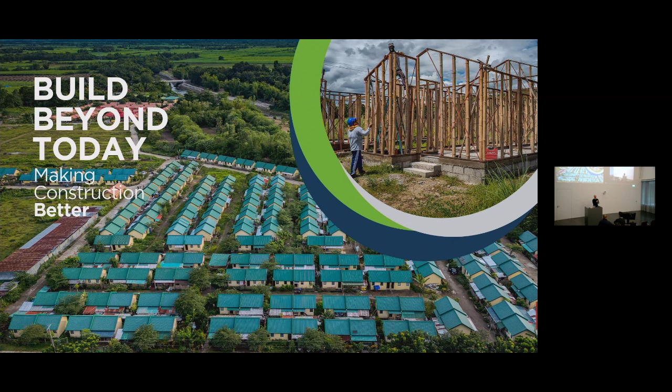Thank you, Johan. My name is Pablo. I'm the general manager of BASE Bahay Foundation. I joined BASE Bahay 5 years ago. Before that, I was the general manager of Hilti Philippines.

I did quite a lot of lunch and learns with various customers, and I really have to make the presentation very interesting. Sometimes customers would be eating while I'm presenting, so I have to make my voice loud and be very animated just to get their attention. I'm so happy I get 100% of your attention today, and thank you for having us.

What we will be showing you today is what we are currently doing at Base Bahay: making construction better. I guess this resonates with everyone's strategy. Making construction better is not only at the high-end construction market with our Hilti power tools, but we try to cascade it all down to the affordable housing sector. That is where we play, and that is where Hilti Foundation takes a very active role.

We are a non-profit organization, initiated as a brainchild of Hilti Foundation. We are actually a technology provider. We develop the technology and try to get as many partners as we can, networking with government, private, and other non-government organizations, so we can build community and offer them the technology we generated through socialized housing. When we talk about socialized housing, we try to make sure it is up to high standards of construction in affordable housing.

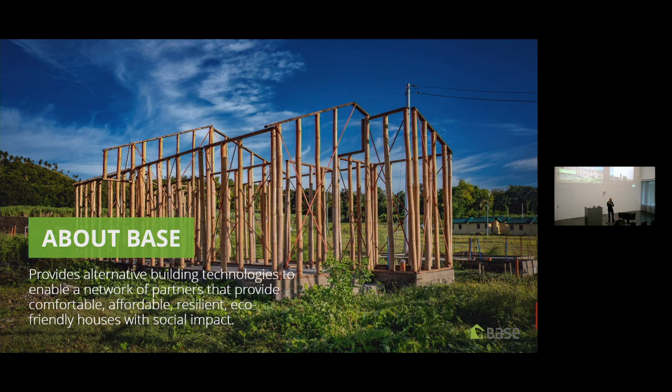My colleague will tell you more about what we are currently doing in Base Bahay. So why socialized housing? Why the affordable housing sector? There is a huge housing gap around the world, and 1.6 billion—it's no joke.

1.6 billion units of housing is needed. To make it a little closer to home, in the Philippines it's a 22 million unit gap in housing. Why the gap? Because there are issues in government funding, issues in the design of the houses, issues in affordability, and issues in the entire ecosystem that makes it work.

The role of Johan in Hilti Foundation is not an easy one because it is such a complex topic, but that is why we're here: how can we address this gap in terms of generation of technology using the same quality and standards? Now, next question: why bamboo?

In the global south, bamboo is an abundant material. If you have this abundant material, it already supports you in terms of affordability of the unit and the design. Now the next question is, how would you design it? How would you use this type of abundant material?

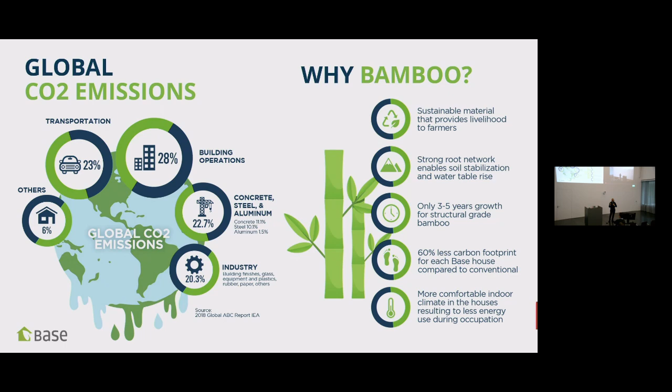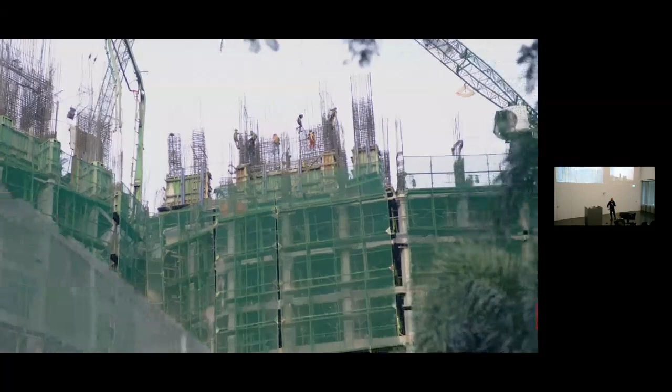Probably some of you have already seen this, but I think it's worth looking at again. As global inflation drives up construction material prices, affordable and innovative solutions for low-income families become even more critical. Our bamboo technology reduces costs by up to 50%, creating green and disaster-resilient homes.

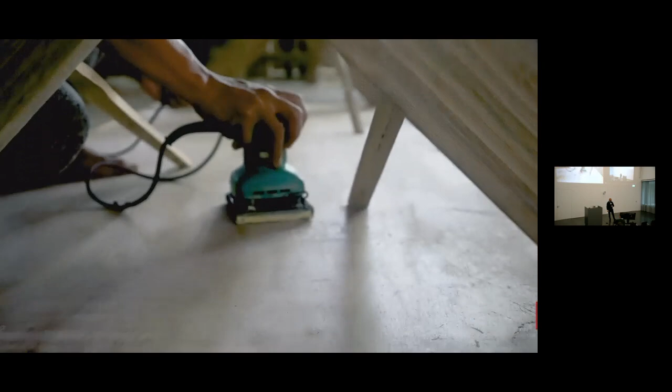Emerging from processing centers, a transformative value chain now supplies engineered bamboo to construction sites. This dynamic engagement has evolved into a thriving bamboo housing industry in the Philippines, meeting affordable housing needs and fostering livelihood opportunities. In the global south, where the greatest housing problems exist, bamboo is abundant, making it even more likely to be the material of choice. Through global partnerships, bamboo has the potential to close the housing gap and help transform societies.

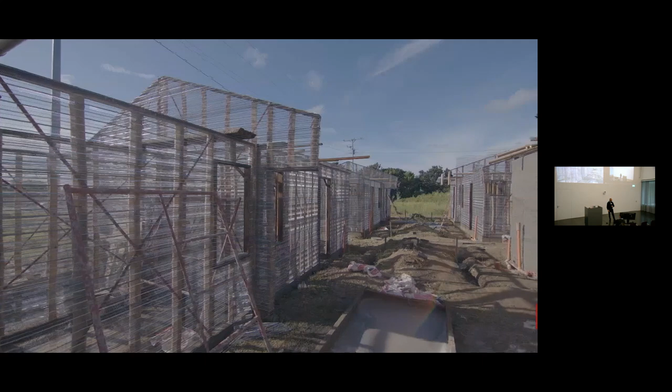The technology you'll hear about today is called the cement bamboo frame technology. It is actually your timber frame, and the design knowledge behind it is very close to your hearts here in Switzerland, because in essence, it is timber frame design, but a little bit re-engineered to fit that affordable housing mindset.

If we are going to use this local material for housing, we have to make sure it's a permanent structure, not one that will fly off when a typhoon hits or get demolished when an earthquake hits. So we designed it to be typhoon resistant and earthquake resistant according to the codes, compliant to the codes. And if you have a partition between two units, you make sure the fire rating is correct, that the wall is fire rated, even if you're using bamboo material. Just the fact that you're thinking in these terms means you're already thinking at an engineering level in the design of affordable housing.

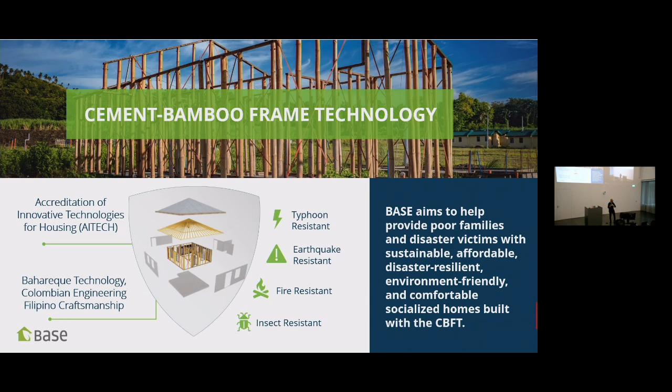And of course, they would say it would be eaten by termites. Yeah, the same thing with any other bio-based material—it would be susceptible to insect infestation, and treatment is crucial. But at the end of the day, our objective is to help poor families, give them this affordable housing unit, give them this design that they can use.

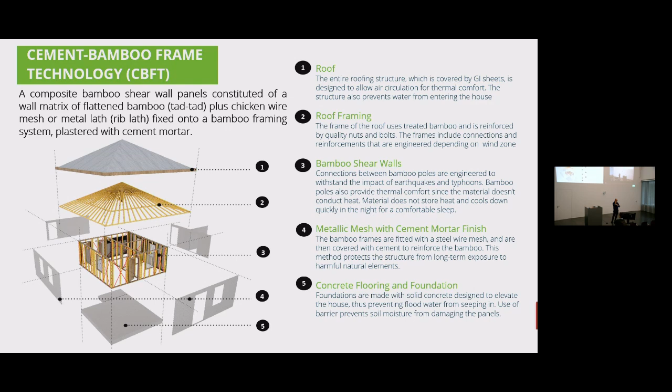The technology you'll be seeing is very similar to your prefab timber frames. You can prefabricate panels, but instead of timber frames, you use whole bamboo poles. Out of these panels, you bring them to the site, assemble them like Lego, and then put up the truss structure. The truss structure, together with the shear wall frame, operates as a single unit, carrying the entire live load, dead load, and all the design load needed. As an architectural cladding, you put a thin cement mortar. There are many examples later on that you'll see more about this.

So the structure in its simplest unit is a panel, composed of a frame, but instead of timber frame, you use bamboo poles. Then you need some sort of architectural cladding—it could also be made of bamboo material, or a wire mesh with a thin coating of cement mortar.

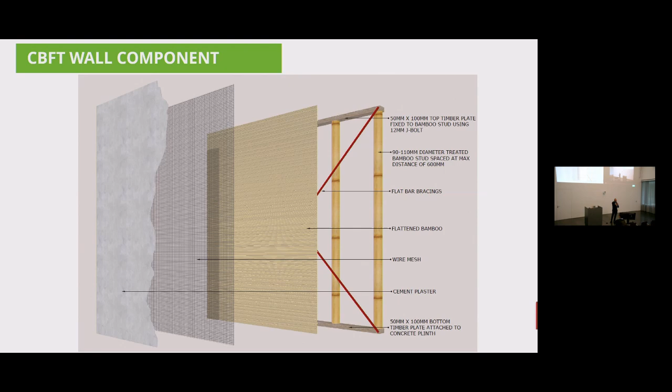Just to show the non-technical among you, here's how it looks when you assemble this.

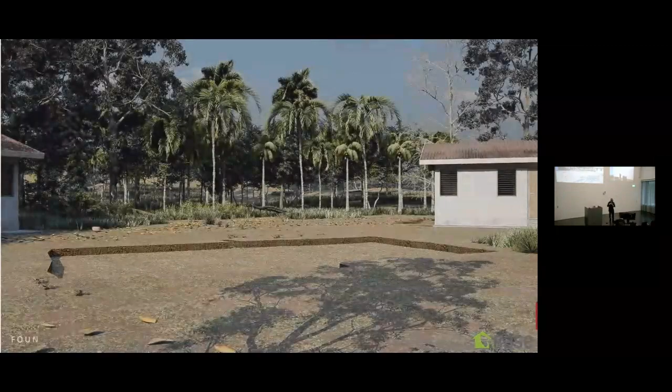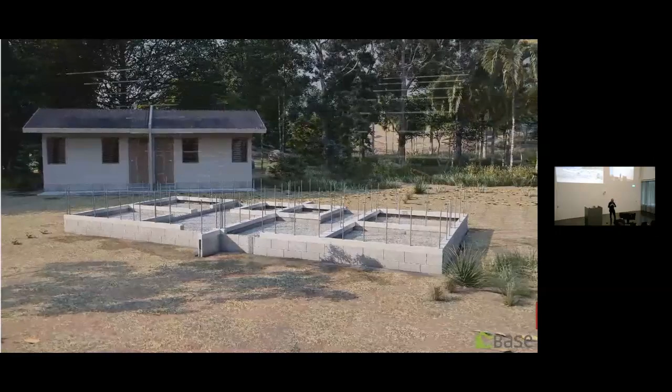Before we begin construction, we make sure the site is fully developed. The way you build the foundation is similar to any type of house—you prepare a tie footing foundation, the same with your reinforcing bar. You do the base, then the flooring, then the sokalo, where you'll put all the panels and all the temperature rebars for your concrete flooring. Very typical to current construction of how we build houses.

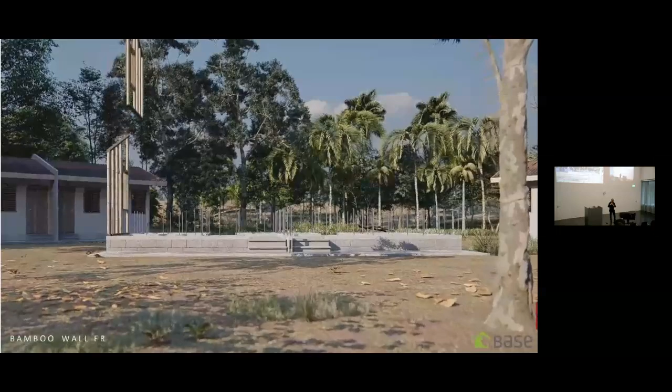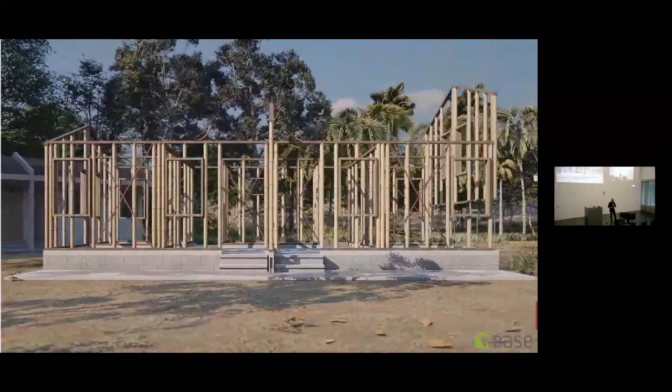Then you do the concrete floors, and then you assemble all the panels, like a Lego. There's a different team working on the panels, and a different team assembling the panels on site—just like the timber frame. And then even the trusses can be modularized, including the lintel or the purlins, all made of bamboo poles.

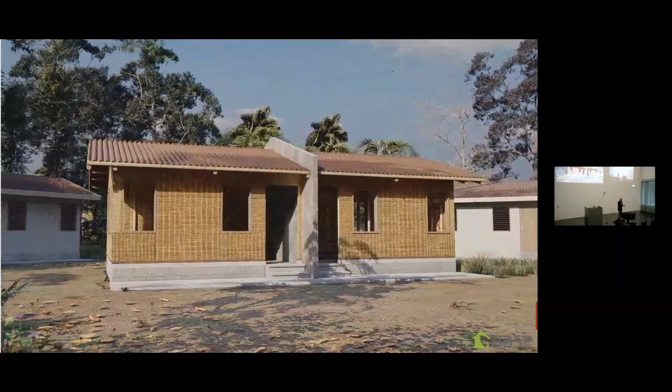Then you put your roofing, which could be any type of material. For architectural cladding, you can even use bamboo materials, put a wire mesh, and like a ferrocement, you plaster it. Then you apply the skim coating, very similar to what you'd do on a mortar wall, and then put the fascia board, door, and windows—very easy. The process can be taught and transferred to the community where we are currently working.

This is a very simplified design. Why does it look like an ordinary reinforced concrete house and not the beautiful bamboo buildings you see in Bali, Indonesia, or in Vietnam? Let Luis answer that for you—I'm transferring this difficult topic to Luis here.

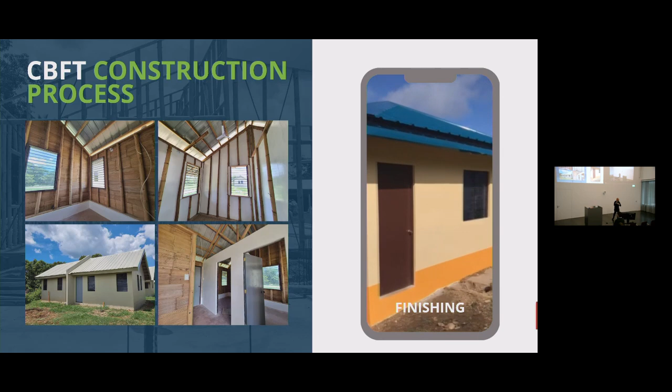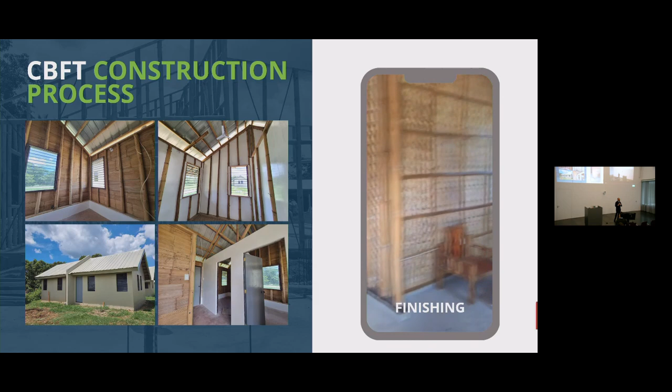So the finishing of the house looks like this. On the outside, it looks like your normal reinforced concrete or concrete hollow block house. But when you look inside, it now depends on who will be receiving the house—they can have this style, or even the white one, depending on how the beneficiary would like the architectural finish of the inside of their house.

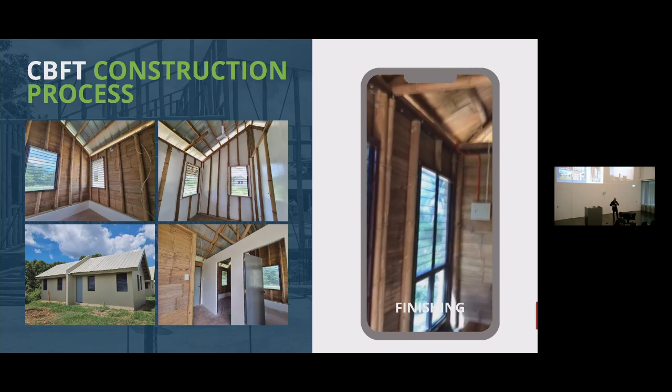We would like to have as many Hilti members know about what we're doing in BASE Bahay through Hilti Foundation. One best form is our EBB, or Engaged Beyond Business. We had Region A2 team, headed by Alim Hirani, the current region head, and they did a house build in the Philippines using the same technology.

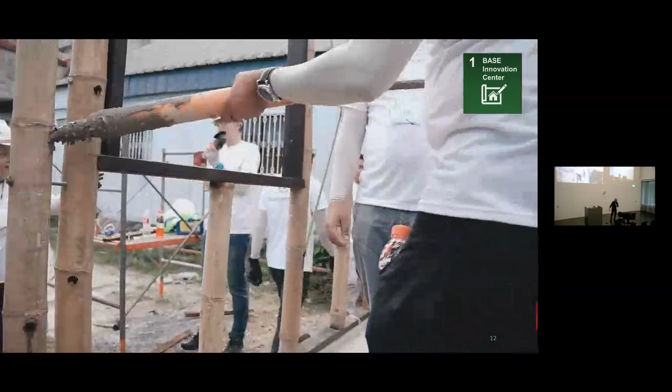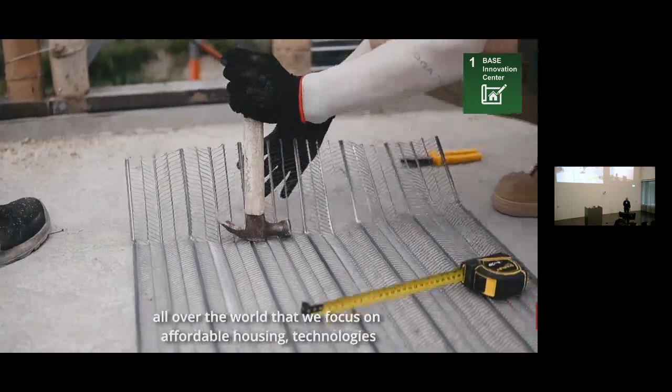We at Hilti believe in building a better future. And it's through the work of the Hilti Foundation all over the world that we focus on affordable housing technologies, on music for social change, and economic empowerment.

Today here in the Philippines, we have a fantastic example of building affordable housing through the cement bamboo frame technology that enables us to hand over a house to underprivileged people who can build on a strong foundation. Having a home is the start to having a more sustainable and self-reliant home and life.

It's a fantastic opportunity, and we're looking forward to many of you coming to the Philippines and experiencing that on the ground firsthand. We're also looking forward to seeing many of our Hilti employees join us in the Engaged Beyond Business, and later during the Q&A you can ask more about that.

Now our objective is to make bamboo a mainstream construction material. For engineers, researchers and technical people in this room, if you would like to use a bio-based material as a mainstream construction material, first it has to be in the codes, or at least the testing and properties have to be standardized. To do that, you need full research to put all the data into the codes. Why does it have to be in the codes? Because if it's not in the codes, no one will build it, no one would specify it, no one would even teach it. And if there's no specification or design work happening, there would be no demand.

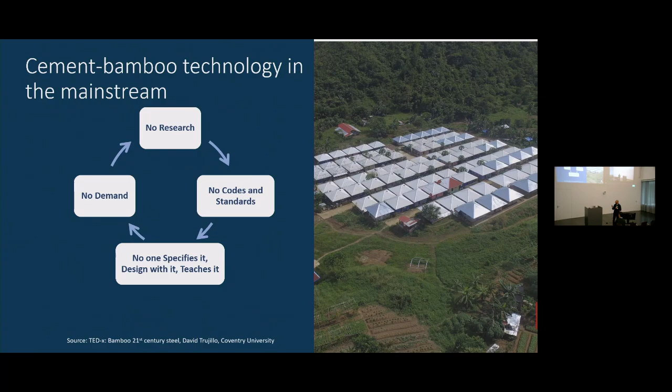That is why through the BASE Innovation Center and the Hilti Foundation, we initiated research on the codes, and then started the technology transfer so we can really make this material a mainstream material for construction. I'll pass you on to my colleague here to discuss more about what we do in the BASE Innovation Center.

Luis? Thank you, Pablo. Hello everyone, and thank you for coming. I'm Luis Felipe Lopez, head of technology at BASE Bahay Foundation in the Philippines.

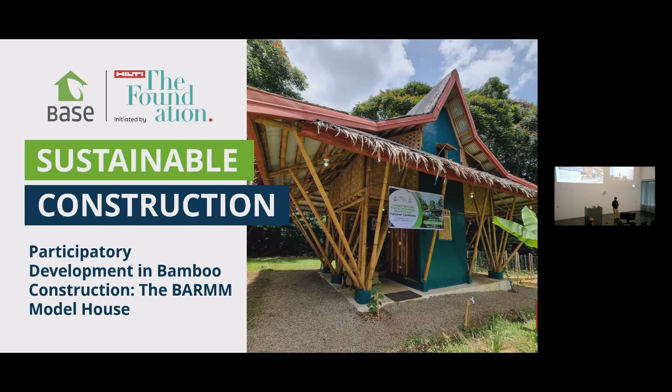Today I want to share with all of you not only what we are doing in our innovation center, but also a project that is really interesting in collaboration with communities, and how this technology can help people who are really in need. Before we go into the project itself, I want to talk a little bit about the Innovation Center and why this is important for us and for the Global South.

In 2021, Hilti Foundation and BASE Bahay decided to launch the BASE Innovation Center. This is a research laboratory that can test structural components, characterize mechanical properties, and do other kinds of work. This is important because bamboo construction has been used in the Global South for thousands of years.

People in the Global South have been living in bamboo huts and bamboo houses for thousands of years, but it was never taken as a structural material. The reason is clear: the development of structural engineering happened in the Northern Hemisphere, in Europe and the US, and there is no bamboo there. So it was never thought of as a structural material. But in the Global South, it is.

Now things are changing, and this is a great opportunity to have a laboratory in a place where bamboo is available, allowing us to work on the research. This is a short tour of the lab. You can see the laboratory. We have a universal testing machine. We can test different properties, different species.

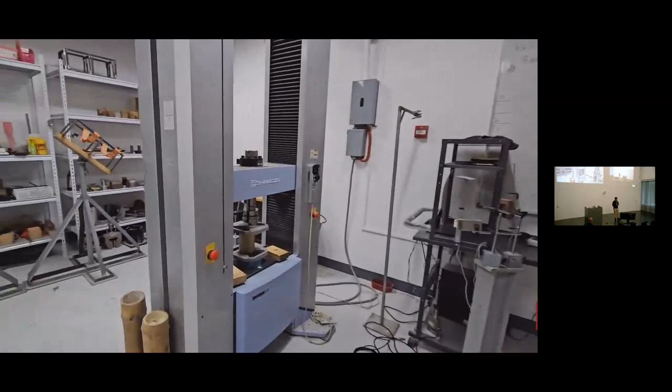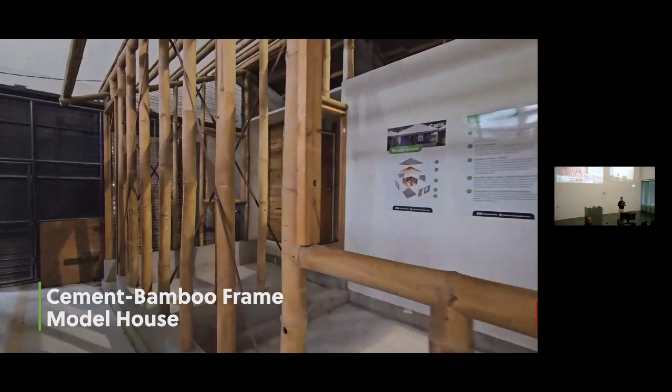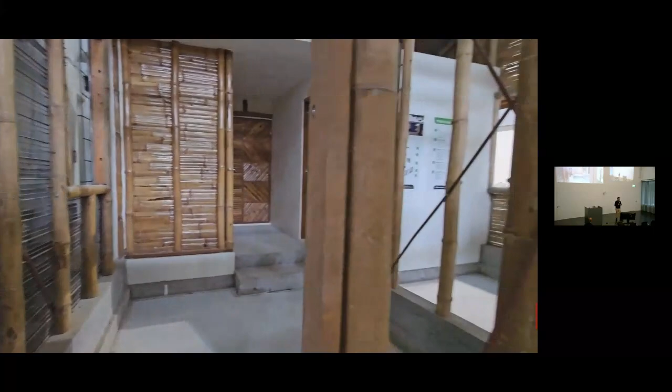We also have other equipment, like this reaction frame with a dynamic actuator where we can test full walls, trusses, connections, and everything we need. And even a full-scale model house that allows us to teach carpenters, contractors, and engineers how to assemble the houses. This is a typical 30 square meter house, the typical solution we offer in the Philippines for communities.

Having this laboratory allows us to have alliances with different universities. We have 7 local universities, 7 international, plus other organizations. Our partner in Switzerland is ETH. Actually, yesterday we were there presenting some results of our research with them.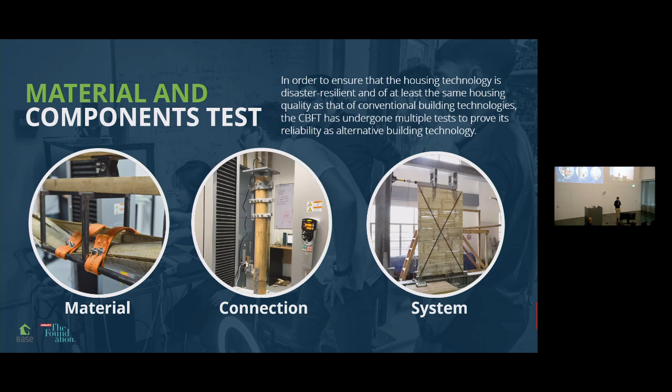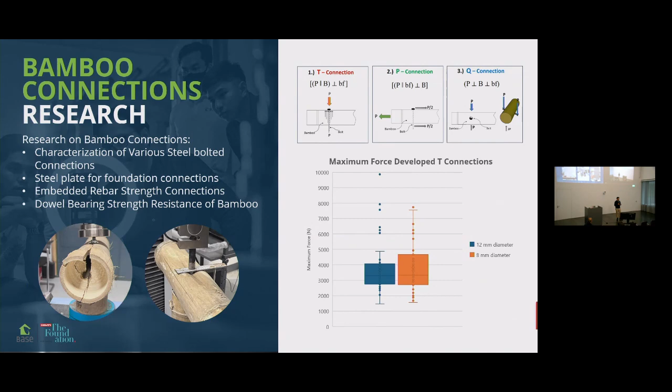In the laboratory, we can do material testing, connections, and components like walls, and these are just a few results. I'm not going to stop here to show any data, but we are doing mechanical properties testing, connection tests, and wall testing to understand and get the data needed for building codes in the future. One of the challenges, as Pablo mentioned, is that there are no building codes.

So if you are an engineer or an architect and you want to build a bamboo house, let's say in Indonesia, you cannot do it. You cannot get a building permit. And the sad part is the material has been used for hundreds of years, but people cannot access solutions.

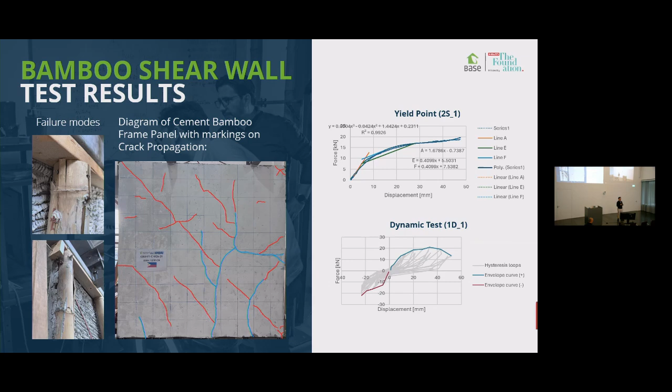So we are doing this. In Switzerland, our main partner in research is ETH. This whole project started as a thesis of a Hilti engineer, Corina Salzer, while she was doing her master at ETH, exploring housing solutions in the Philippines using bamboo. That's how this BASE Bahay concept was created. Corina imagined the entire concept, and later on I joined as technical support.

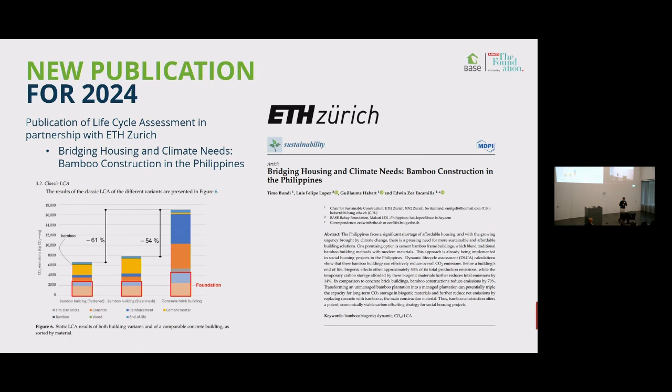About 10, 12 years ago, we were like two kids running in the Philippines trying to see how we can do this. This is some publications we do, but the topic I want to show you today is this project. It's a very interesting project.

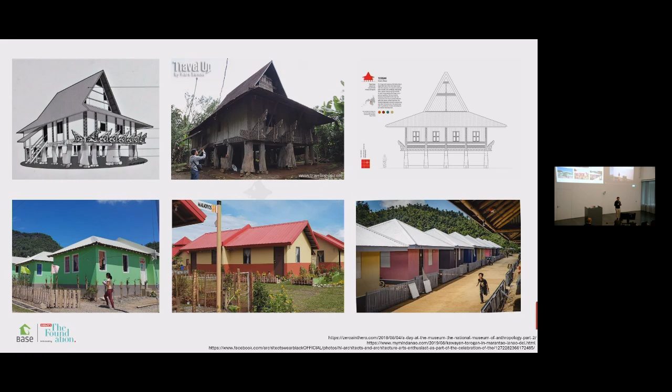So our design team worked together with the community to understand their needs and concepts, and we ended up creating a fusion solution between our technology and their needs. This was the result of many meetings with the community, understanding what they want and which parts of the houses they could be flexible to change and which not. And then we ended up doing this house.

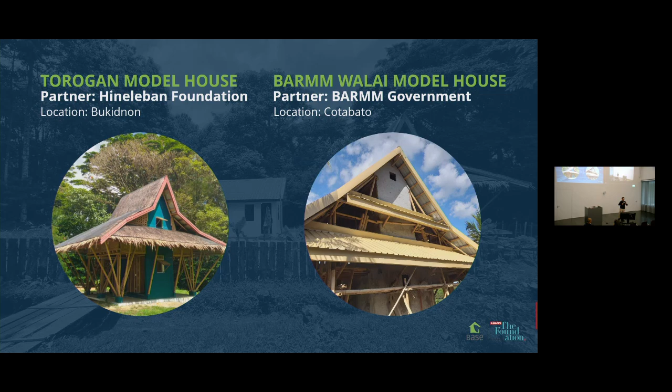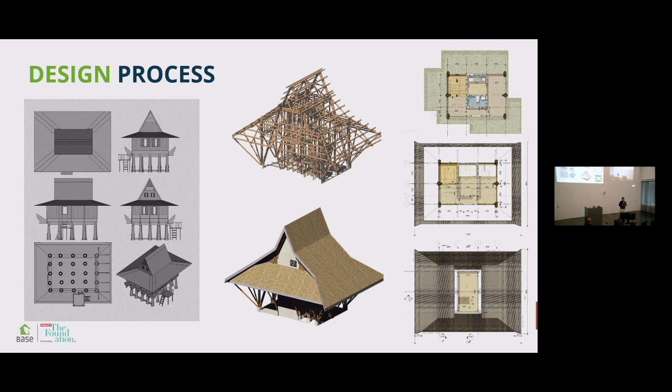The house on the left side was our first model house. It's a two-story house. Later on we worked on a slightly bigger solution that adopts more of their traditions and way of life. You can see here the model; the first model house is 55 square meters, two stories. In this picture you can see the interpretation of their traditions taken into the house we're now proposing.

However, the eaves can be broken during the typhoon, destroyed. That part can resist maybe 100, 150 kilometers per hour, but not 250. The important thing is to keep the people alive and safe inside this core. If they survive, they can repair the house later on. That was the main structural concept in this house.

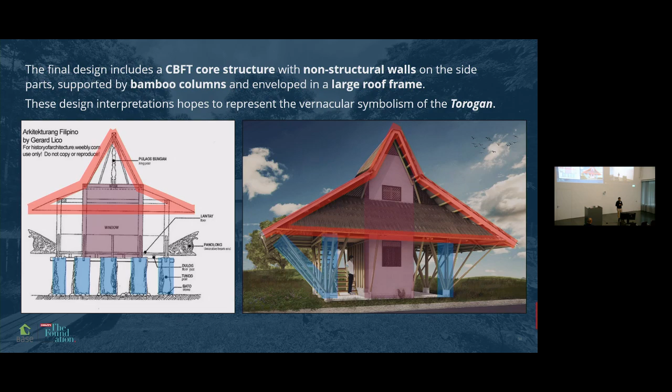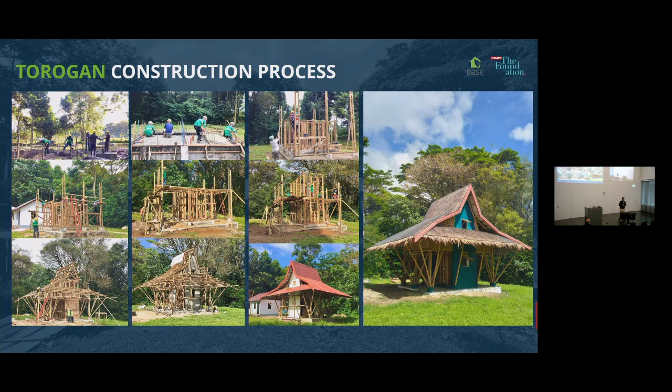Some pictures of the construction process—it was for us also an experience. As you saw in the Pablo presentation, our system is a prefabricated panel system, semi-modular, easy to assemble, easy to build; you can build a house in 3 weeks, quite quickly. Here it's totally different. We could produce some prefabricated panels, but most of the house is like a big handicraft that you need to do element by element and connection by connection. But this is the kind of project these communities like to have, because it's their way.

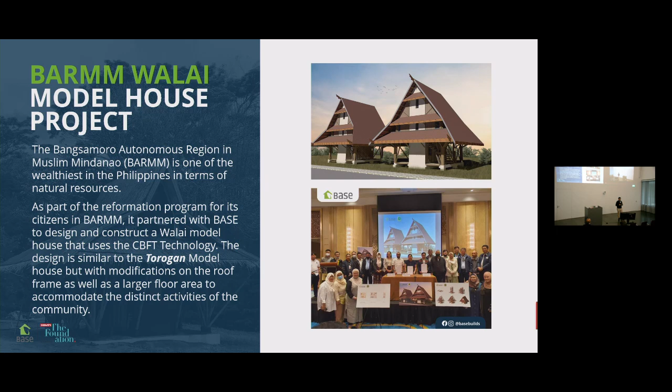Here we sign an agreement. You can see in the picture Pablo and Maricen with all the community of the Bangsamoro Autonomous Region. This is the Walai house, a little bit bigger, with different spaces where they can have their own traditional activities. It's 75 square meters in area, and we are doing the construction right now.

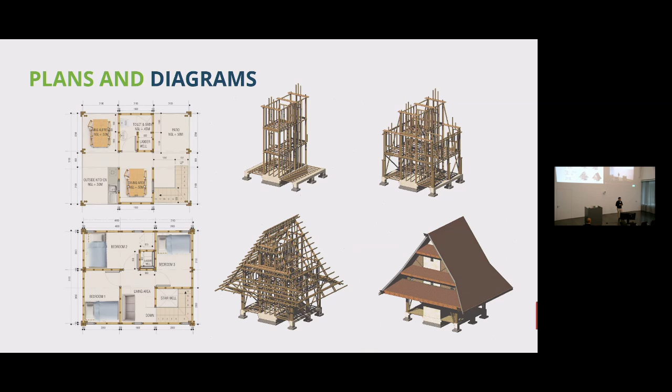It's not yet complete. We expect to have this house finished by February this year. So we will send you the pictures of the final results.

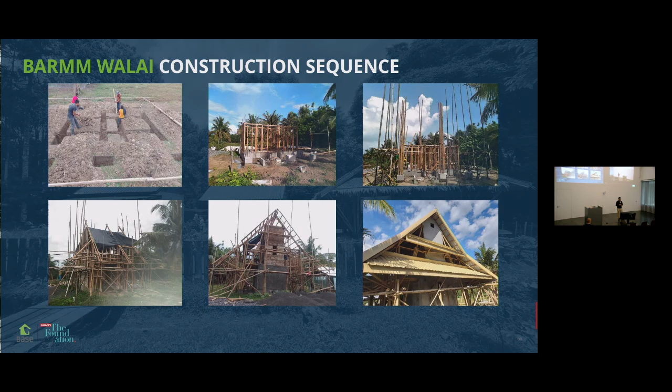And all other projects aside of the construction of houses in the Philippines, we did the first CBFT in India with the MO there with Hilti India. We did 2 houses, trying to transfer the technology to a local partner there. It was a very successful project, and this year we expect to do more houses with them.

In the Philippines, we also help other organizations to build orphanages, weaving centers, even offices for producers of bamboo, school buildings, and local markets. So it's not only limited to housing, it's also helping the communities to create healthy environments, houses that are resilient, but at the same time more green.

And I want to say that the houses that we build are not sustainable. That's not the word that we should use for our houses. Our houses are regenerative. Why? Because we are carbon positive. So when you are carbon positive, you are taking more carbon than the carbon used to build. And that's the only way we can fix the problem that we are having right now in the planet. We need to do restorative constructions. Sustainable is not anymore enough.

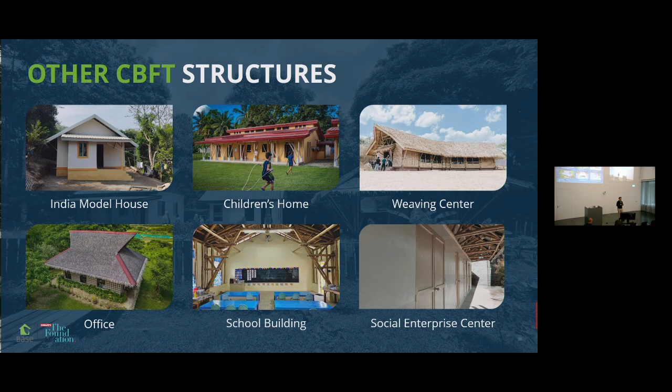So that's the presentation I have for today. Hope you enjoy it. And if you have questions, we are ready to. Thank you very much.